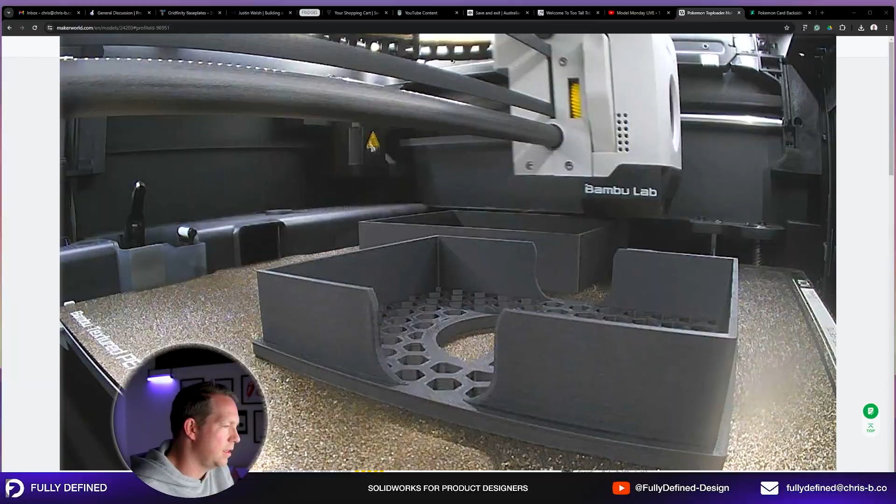This one today, we're going to help my son create a little carry box for his Pokemon cards. Now, I did try and shortcut this by downloading, and the problem with this, I didn't really look through the comments and details of the project that closely, but it's not just for the cards. So when we did print it and he pulled it off the printer and fit the cards in, it just had a little bit too much room. So I said we can do better. We can stick to the original style of this and do something that's actually going to suit the cards without the holders that they come with.

So this video is going to be for beginners. We're going to look at how to build a simple two-part box and also reference a sketch image. So we're going to bring a sketch image in and use that in our drawing. So just a shout out to Taniva 1030 on MakerWorld for his model. Did rate it 5 stars. Very good, just not quite the size for what we're after here. So let's get into it.

I'm going to start with just a standard part file. And we're going to do this in a multi-body part, and then we'll split them out for the 3D printing aspect. Okay, so what we're going to start with is actually getting the size of the card and the artwork into our file here. I'm not going to do anything fancy. Main thing that I am going to do is I've done a search online and just found a good piece of artwork. This one on DeviantArt by Atomic Monkey TCG. I just logged in and downloaded this image because one thing that you can do in SolidWorks is insert images into your sketches, into your part files, into your assemblies, often for reference. And that's what we're going to do here. So I'm going to show you how to do that.

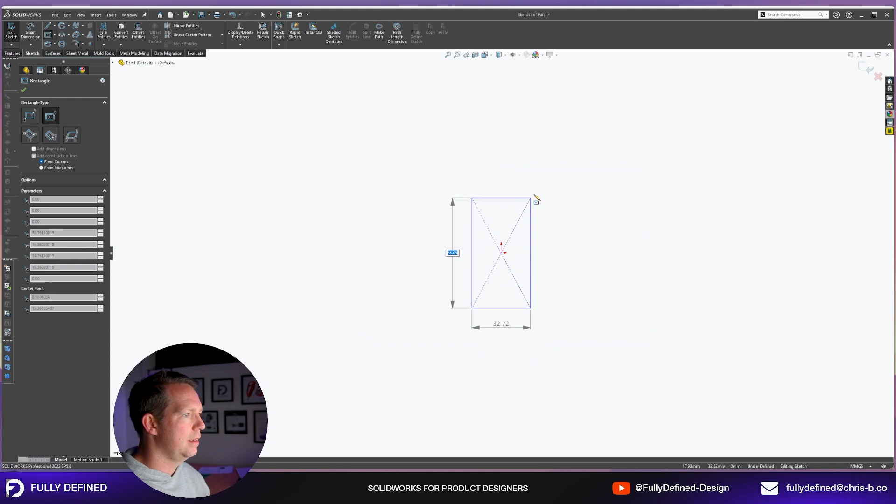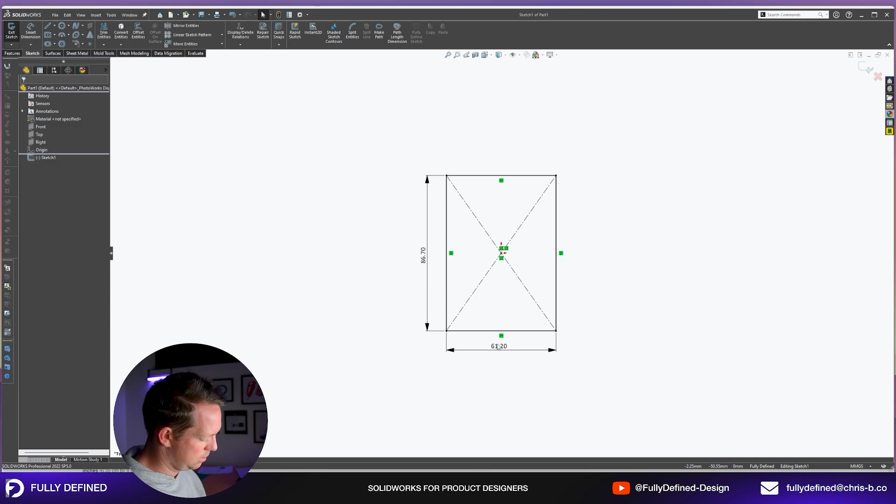First, on this top plane, we're going to draw our card and dimension it. So we're doing a center rectangle. I'll just grab my calipers. I'm just going to measure the size of this card. Could look it up, but I'm just going to do it while we've got it here. 61.2 by 86.7. Let's just check if that's the right size. All right. They are 2.5 by 3.5 inches, 63 by 88 millimeters. So we're a little bit undersized here with these ones. We don't mind a little bit of clearance. Maybe that card I had was a bit of a dodgy cut. It does look a little bit undersized compared to another one. So I'll go with the official size, 88 by 63.

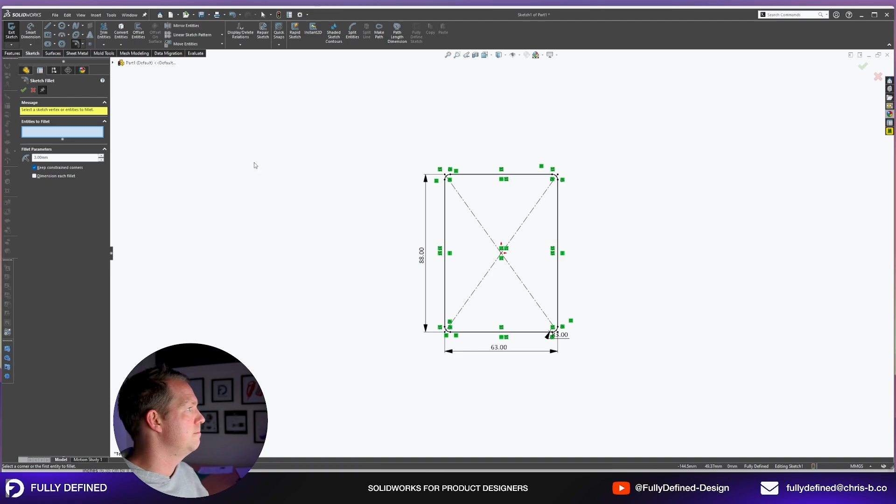I'm not going to worry so much about the radius. I don't think we're going to put that in our part, but it looks to be about 3 millimeters. Let's put that in, and we're just going to leave this here as a sketch. And then we're going to do another sketch on the top plane, and this is where we're going to insert our image. So to do that, I'm going to go Tools, Sketch Tools, and I actually have to be in a sketch for this to work, and I can use this original sketch. So I'm going to use that there. Now, Tools, Sketch Picture, which is just down here. I'll just move my head for a second. Sketch picture, it's just off the screen where you can see it right there at the bottom.

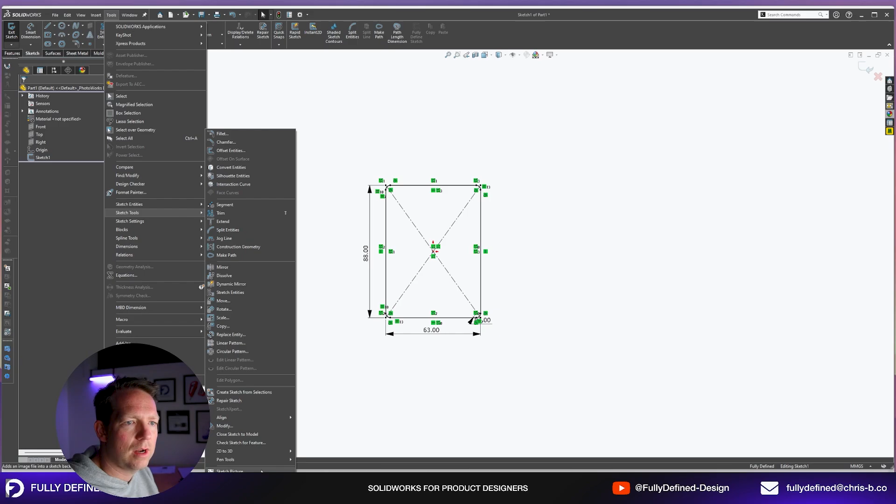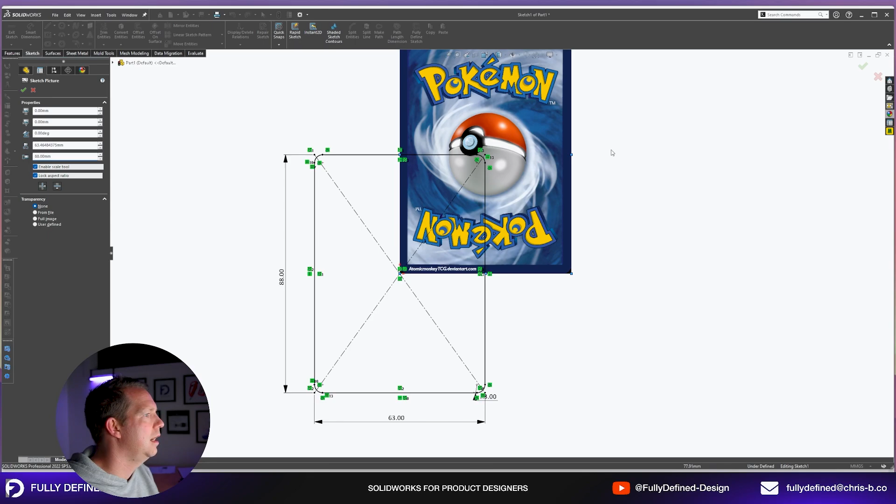And then I'm going to go to the file. Now I've just put it in my downloads. That's this Pokemon card PNG. I'm going to open that up. Low resolution is fine. And you can see it's huge, okay? But we can scale it down, and I can scale it here to dimensions. So we've got this 1477 by 2048. If I change that to 88 and scale that card right down to size, and then if I want to move the location, I can click and drag it manually like this, or I can actually put in some dimensions. So X direction is going horizontally side to side. So that's going to be minus 31.5. And then height is going to be minus 44. All right, and then we have it in perfect location.

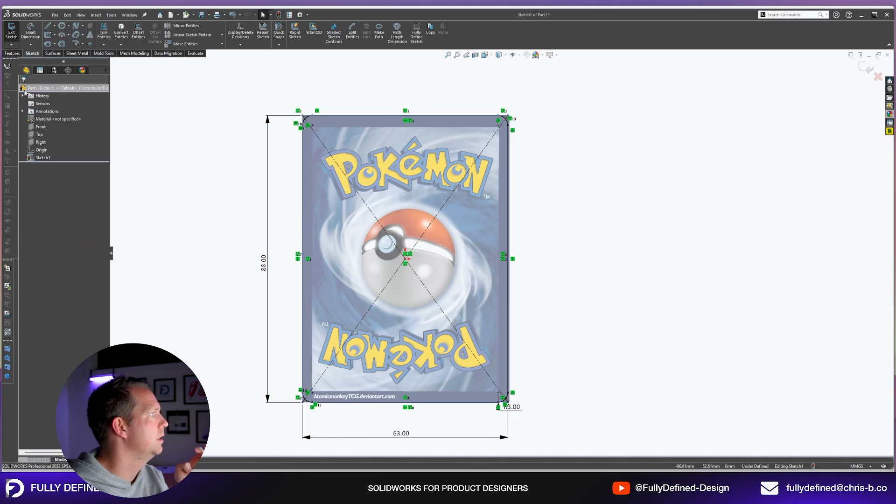Now we can also make it a bit transparent. So transparency, you can go full image and just put that up to like 0.5. So we can kind of see through it. And then I'm going to press OK. Now that image is going to show whilst the sketch is visible. If the sketch is hidden, then I can't see that image. Okay, so now let's draw our box. First, let's save that. I don't want to lose this one. Always good to get a save off early. Okay, and we're going to use the one that we downloaded and printed as a reference.

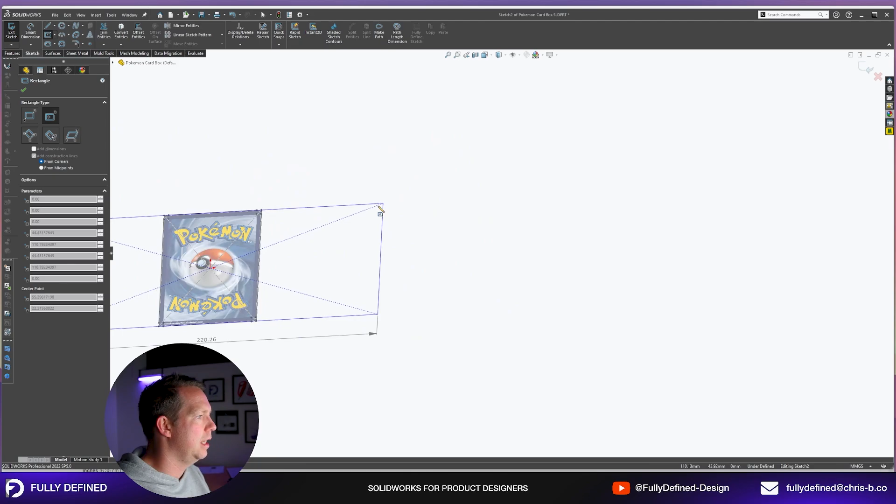Okay, it's quite a nice design. It's got some quite good thickness and detail to it, so we can reference a lot of that, but we don't need to be exactly the same. Let's go on the top plane, and first I'm going to design the inner frame, and to do that I'm just going to go like a millimeter bigger than the existing. So I've dropped it on the center point, just going to put a millimeter on that side and a millimeter on this side. And then these are going to be my inner walls.

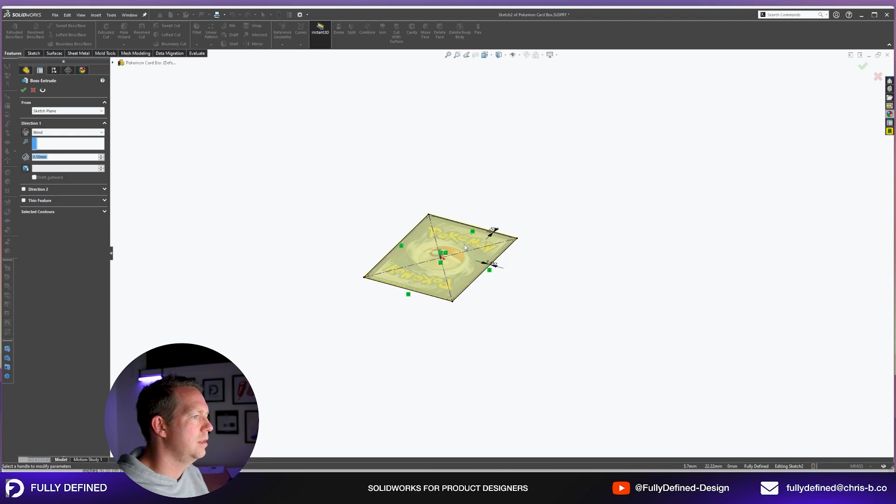My inner walls on this sample here are about 1.5 millimeters. They feel a little bit flimsy. This is for my son, he's 6, so I'm going to bump those up a little bit. And I want to give them some good height, because that's going to determine how many cards they can fit in. So I'm going to make it 20 mil. Now this extrude here, I'm going to use the thin feature. I'm going to set that thickness to 2. I'm going to set the height to 22. Press OK.

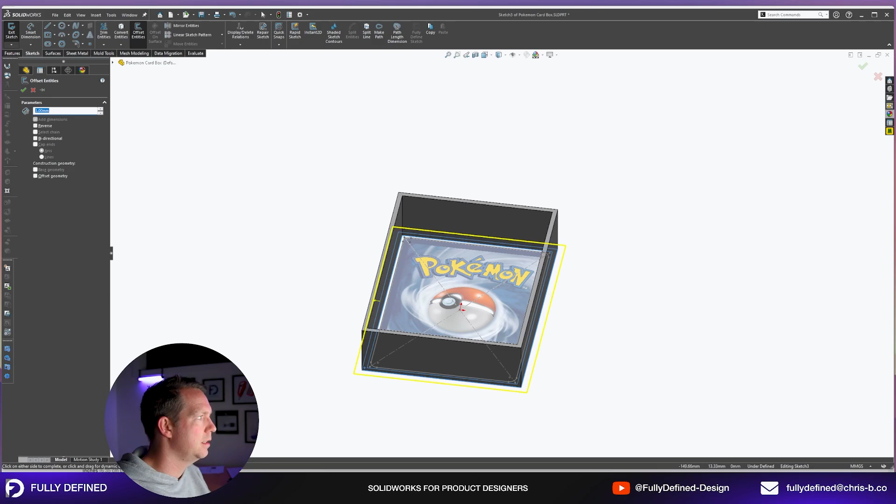And then I want to do a surrounding bottom cover. Now that is going to have a 3 mil wall thickness. So here we're going to reference the existing shape and use the offset entities tool. So on the sketch toolbar, offset entities, change that to 3 millimeters, press OK, and then thickness. Extrude, this one change to blind, 3 millimeters. We're going to go down. So when we do this, you can see instead of going up, it would merge in with the existing body and reduce the height of those walls. I want to make them a bit longer, so I'm going down. Okay, and that creates the bottom of my box.

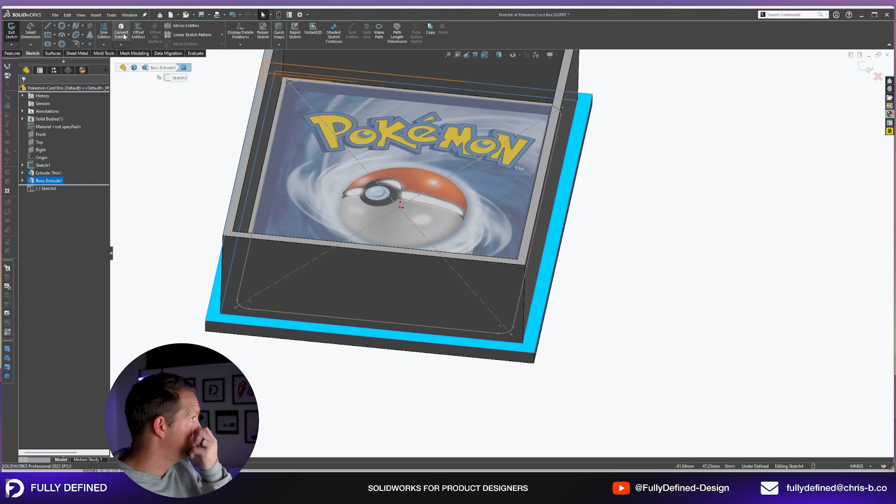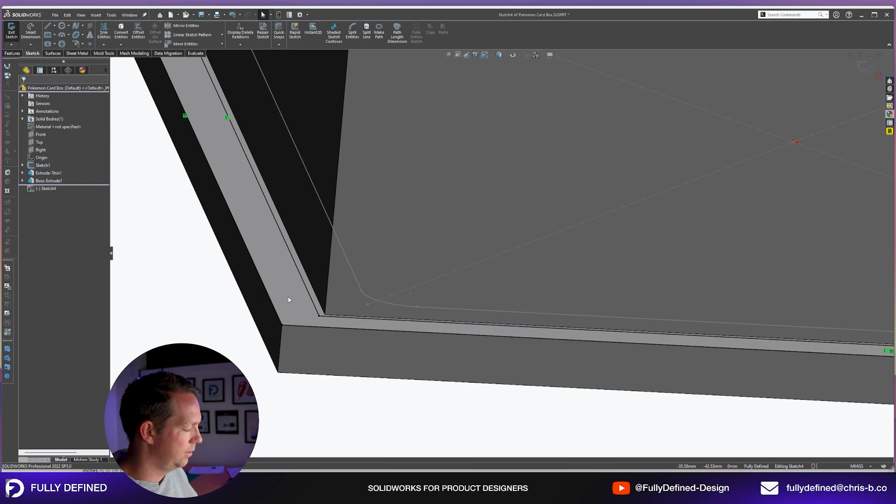All right, now that looks pretty good. Let's do the top side of the box. So how this will work, we will do a sketch here, convert entities for the outside, and then for the inside layer, I'm going to select loop. I want to select around the face, and we'll give this a little bit of clearance. So let's say 0.4 of a millimeter. Okay, so when those two boxes slide over each other, it's not going to be like a super tight fit. They're not going to drag on the edges. We know there's a bit of tolerance in 3D printing, so we'll keep that nice and smooth there.

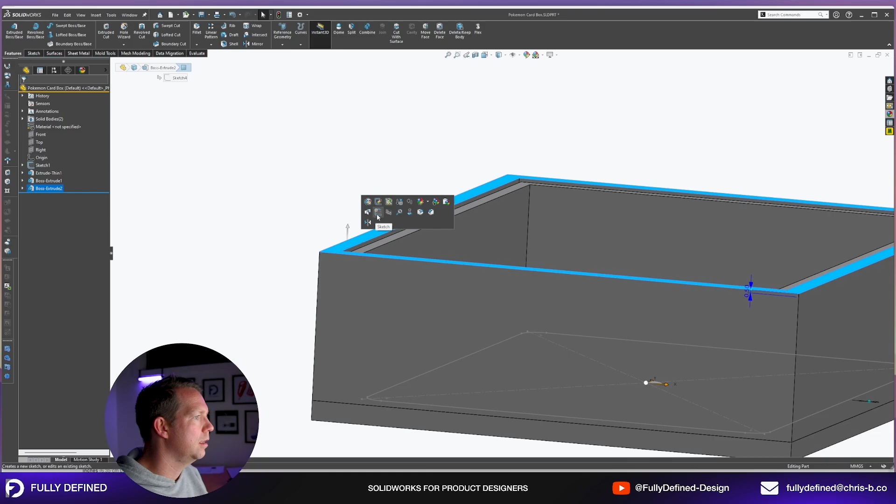And we will go just a little bit past this face, maybe half a millimeter. All right, so this side is going to sit above that face there. So you can see reverse offset. When that's ticked, it's going above. I'm going to uncheck merge result because this is going to be the outside of the box. And then I'm going to convert that edge and do another extrude. This will be blind 3 millimeters. This will merge just with this one. And then we have our box. We have 2 solid bodies and we have a top and a bottom.

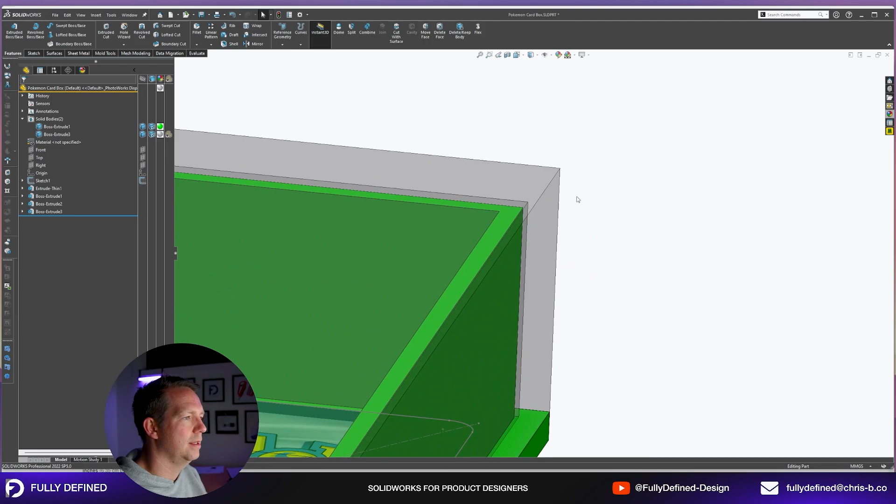Let's make the bottom body a different color. Let's make it green. And if we make the top transparent, then we can see what our box looks like. And we can see in the preview the clearances that we have around the part. All right, so that's the basics done. Now we can add a little bit of finesse to this file.

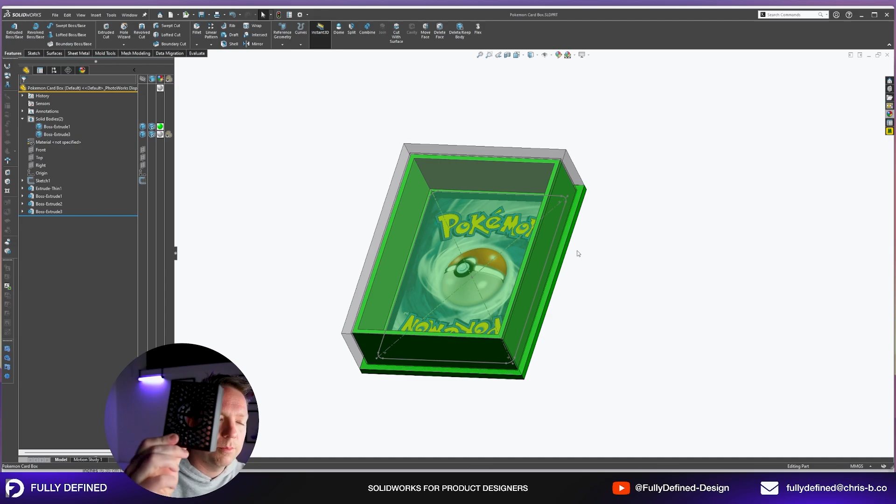So first up, what I'd like to do, as this sample has here, it's got a really nice sort of detail on the front and the back. It's got a Pokémon logo, or Pokeball. It's got a nice hexagonal cut through everything. And this inside piece here has a nice shape through the middle so that you can grab the cards out from the sides. So we're going to add in those details.

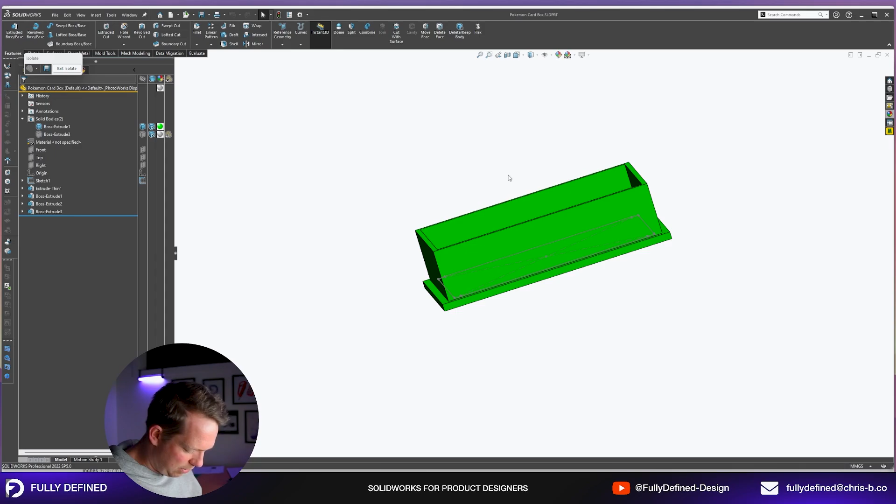Let's add in the one at the bottom first. This one should be pretty easy. So just using this size as a reference, felt pretty good. There's 25 millimeters through the middle. So what we can do here is a sketch on this top face, a rectangle shape, going all the way to the edges, make it 25 millimeters in between. And I'm going to do cut extrude up to this surface.

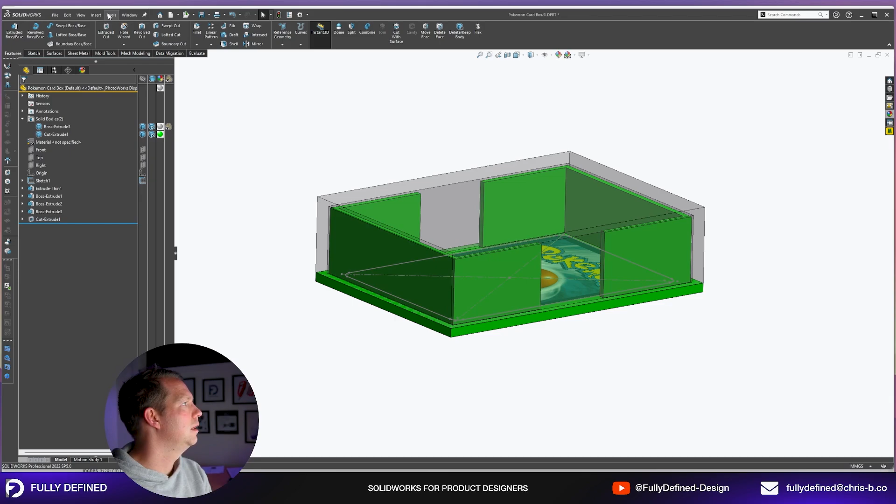Because I use the isolate tool, this is the only body that's showing at the moment, which means if I do this cut, it's only going to cut through this body. I'm going to turn isolate off. You can see the other body still has its full shape. To use isolate, you can right click on a body. You can click on this little menu here where it says isolate. I have also created a hotkey, which is the letter I. So when I select a body and I press I, it automatically goes to that isolate mode. Now this one also has some nice fillets on those edges.

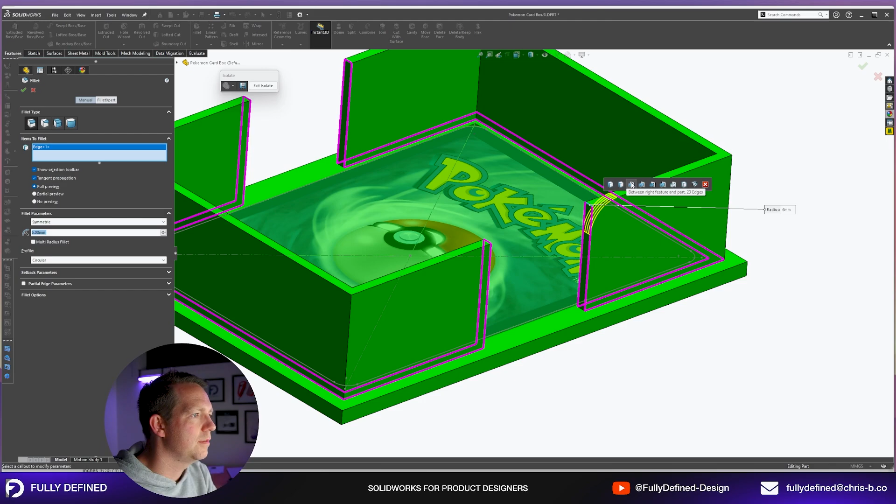So let's add some fillets. So top and bottom, it's got fillets. I'm just looking to see if there's a shortcut here to get the edges that I want. Doesn't look like it. That's okay. I'm going to click on these 4 edges on both sides. Okay. Now that one looks pretty good.

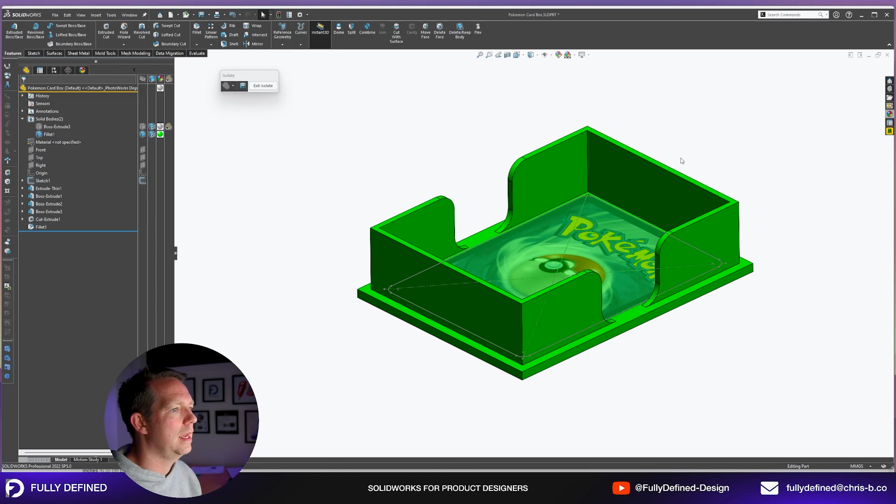On our parts, at the moment, we've also got these sharp corners everywhere. So we'll just add a little fillet to these, and do the same on the outside edges too. So we'll just give it like half a millimeter radius on the inside edges. We can do it selecting each of these on the inside.

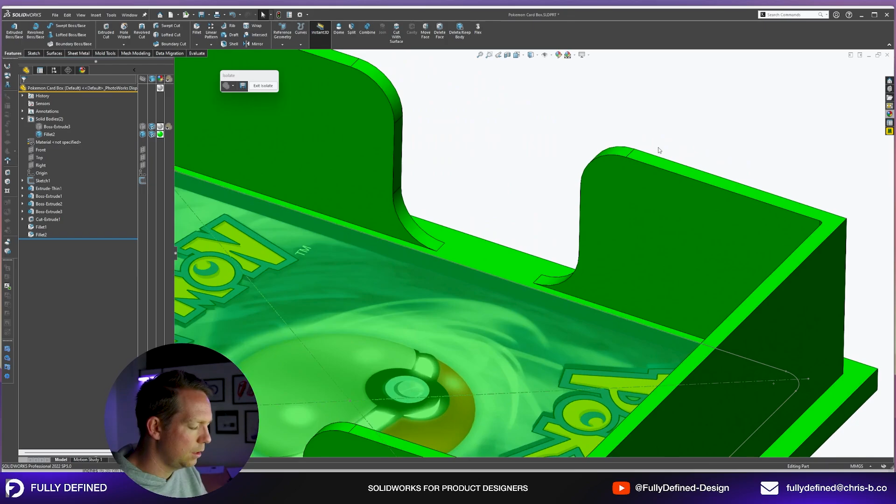Okay, so 4 edges. Now I can only do fillets on one body at a time. So even though there's a separate body, which will probably have some of the same fillets, we'll just do them separately. The thickness of this part is 2 millimeters.

My internal radius is 0.5, then I should make my external radius the internal radius plus the thickness. So that would be 2.5. And then if we want to keep a nice shape going, we're going from this wall to this wall, 3 millimeters. So I could do a 5 millimeter radius on these outside edges here. Okay, so that is looking much nicer now.

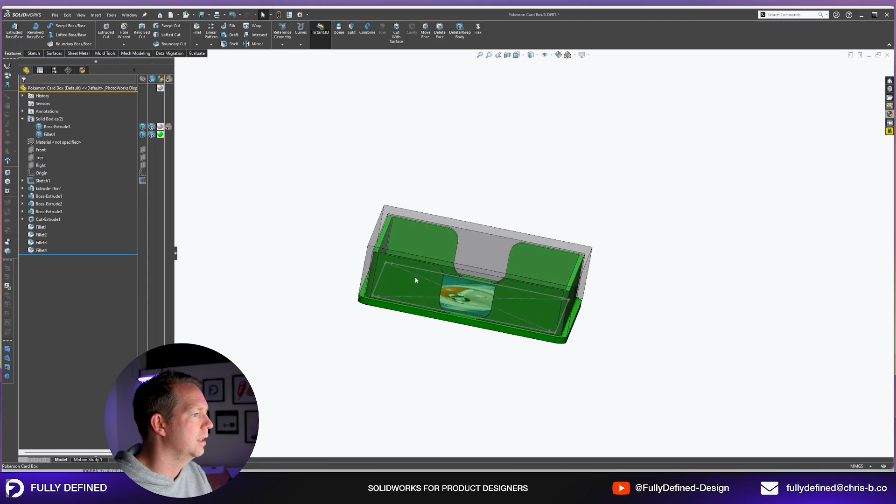If I exit isolate and I look at the outside box, we can see that it doesn't quite match up. So we'll have to do the same treatment on the inside. That's fine. Let's do that now. So I'm going to isolate this one, hide my sketch. On the inside, I'm going to do 0.5 mil radiuses.

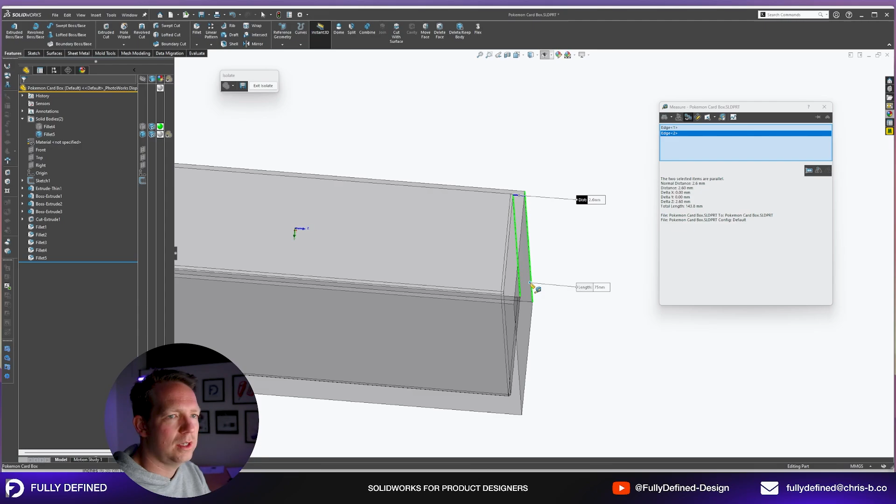And on the outside, where our thickness has changed a little bit because we did that offset, it's only 2.6, but I want to keep those fillets the same. So I'm going to do 5 mil, I think it's 5.5. No, 5 mil is correct. 5 millimeters for each of these outside edges so that the top and bottom match.

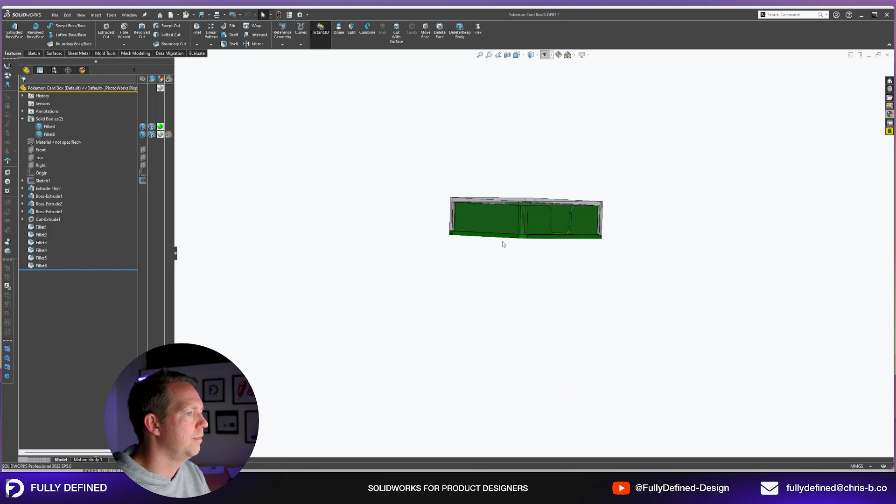And then for the very top face, you're going to leave that flat, okay? Because when we do our 3D print, that's going to be flat on the print bed. If I need to afterwards, I can just take the edge off with a ruler or a sharp blade. I think it'll be all right. So the radiuses are now looking pretty good.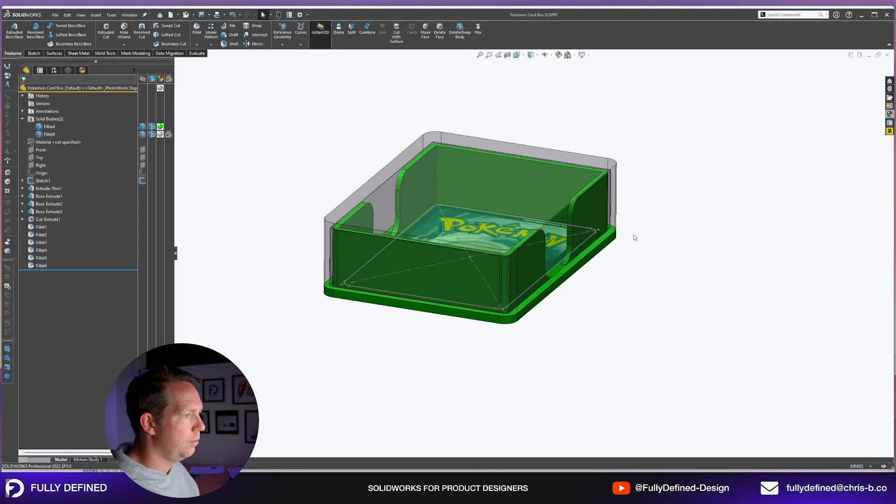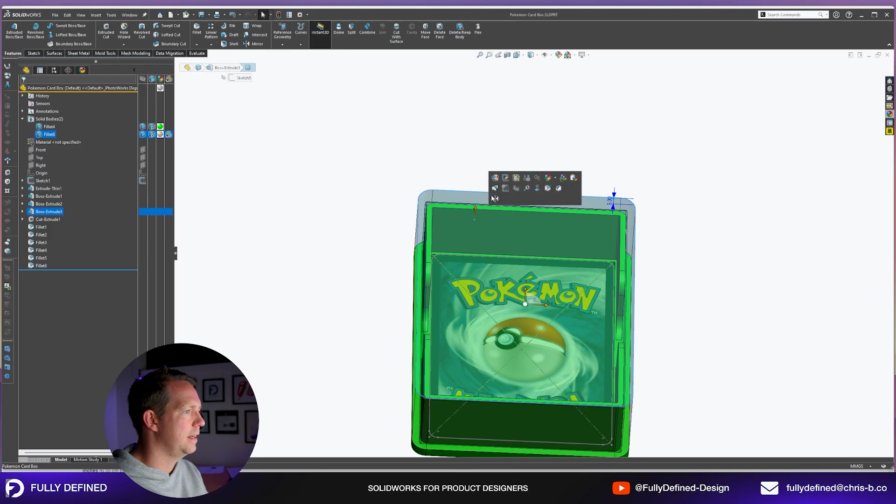Let's add a little bit of detail. What I wanted to do was actually do the similar sort of pattern for the Pokeball, but actually reference the artwork that's there. So on the front and back, we can see the Pokemon text and we can see the ball. Now to do that, I have to make sure that I'm doing the same thing. If the card is facing the front or the back, I have to flip it around. So to start with, we'll do it on the front face so that if the cards are facing up, let's say, we can get that text showing.

Now, before I do that, I actually thought maybe I could get the Pokemon text in here. Pokemon's a pretty common logo. So instead of tracing it in SolidWorks, I should be able to find a vector file of that online. A vector file is one that has the line work within the file. So I've gone to a site that I've used for a very long time, brandsoftheworld.com.

You have to log in. I've done a search and I can see there's a Pokemon logo here, which has an AI file. So I'm going to download that file and open that up. Now it's an .ai file. We can't import that straight into SolidWorks, but I can open the AI file, resize it, and then save it as a DXF file. That DXF file we can import straight into SolidWorks.

I'm not sure exactly how well this logo will 3D print, or how well it will look in the box, but it'll take us a few minutes to try it. All right, so the vector file that we've got, we can see here. It's actually got a few more layers than I would like. But let's focus maybe just on the blue colors. So I'm going to edit this, actually I've got a good idea. I'm just going to merge everything.

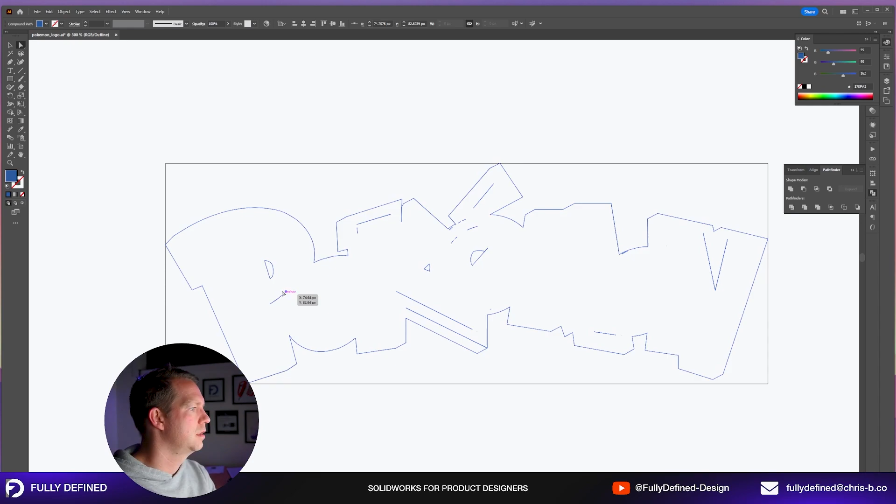Because if I just get an outline, that's probably going to be enough. And then I'm just going to get rid of these holes on the inside. Now these are Illustrator tools. I'm not doing a tutorial on this one, but just showing you part of my process here. These are some of the tools of the trade for a product designer.

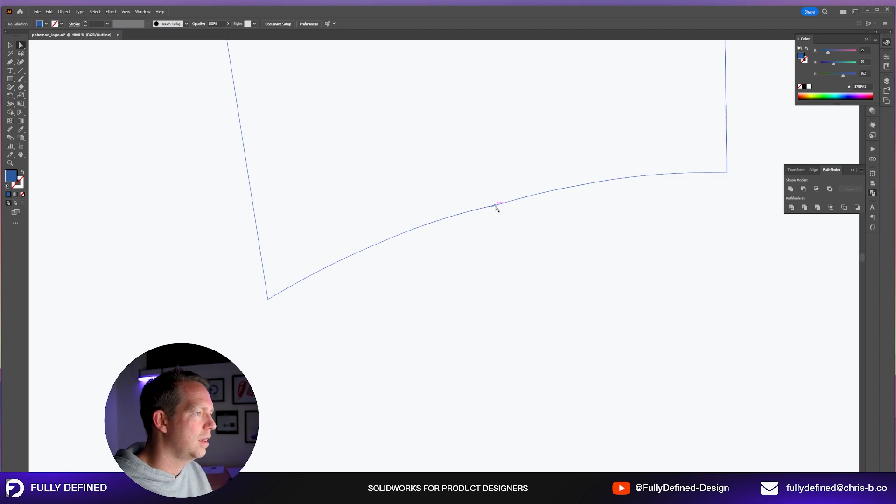Okay, I'm just clearing out all the dangling lines. Just going to save me time in SolidWorks. I still might have issues with little bits like that. But I could probably clean that up by selecting it all and just going to Path > Simplify.

And yeah, that just gets rid of a few points and it's still going to do the trick, right? Okay, so that looks pretty good. What size does it need to be? About, if I'm measuring on the card, 51 millimeters. So if I select it, I just change the size here to width 51 millimeters. Okay, that's the size I need.

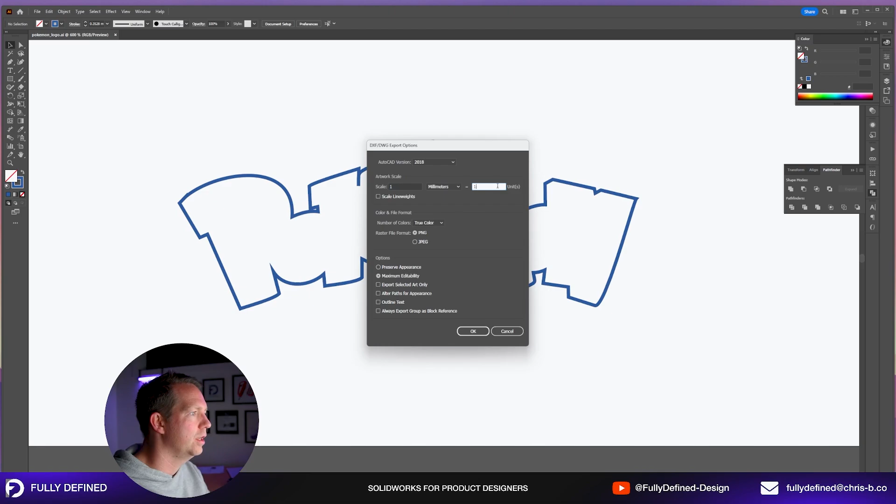I'm going to go to an outline and I'm going to go to my folder where everything is, and I'm going to save it as an AI file first so I can come back and edit it if I need to. But after that, I'm going to export as a DXF file. So I'm going to go File, Export as, save as type, DXF, export. I'm going to pick 1 millimeter equal 1 unit because I'm in millimeters within SolidWorks.

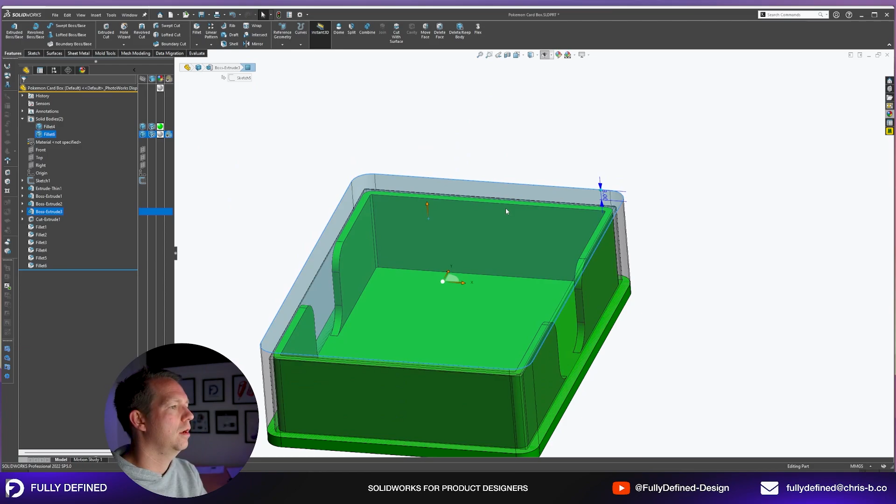Okay. Let's flick back over. We are in a sketch here already. Now, when you insert a DXF, you actually want to be out of a sketch and you select the face you want to insert the sketch. So I'm selecting this top face and I'm going to insert DXF. I'm going to browse to that folder. The file is, you can see it here. Gonna go open. I'm gonna import it as a 2D sketch, and I'm gonna use millimeters for the imported data and go finish. I'll import it to the origin.

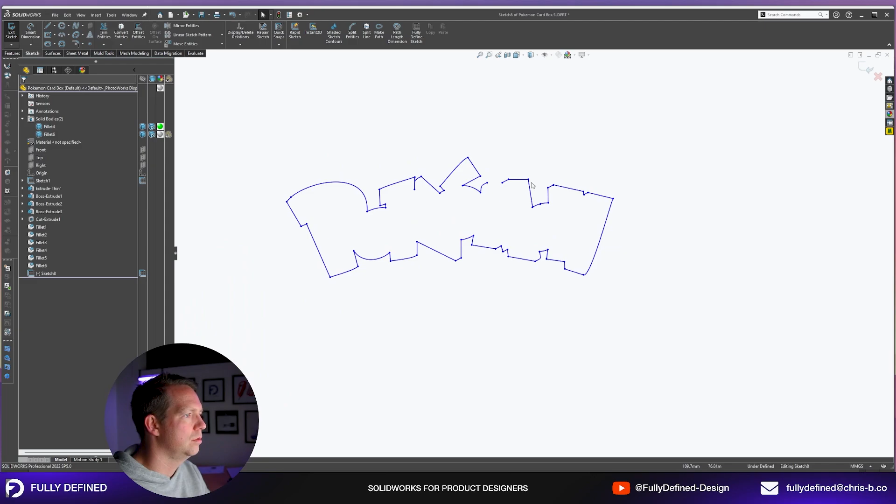Where is it imported to? Over here. It's just hidden at the moment. I'll turn that on, I can see it. I'll right click here and go make edit sketch. That turns it into a normal sketch that I can then move. So I'm going to edit sketch. I'm going to group it. So select all of those, make it into a block. I'm just going to move it into position.

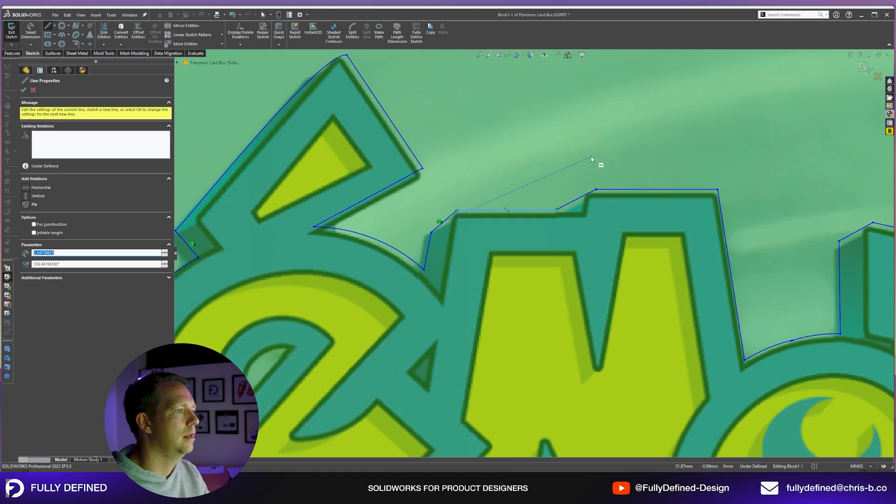Now you can see it hasn't imported perfectly, but maybe it saved me a little bit of time. I think I might just have to scale it up a little bit. Let me just get the scale right. Okay, that looks pretty cool. I can explode the block or edit the block just to clean up these little bits here. They've got a bit funny. I'm just going to draw that one in there, and this one here. Just going to delete that one, take that over, trim that away. Right, rest of it looks decent. Close the block, close the sketch.

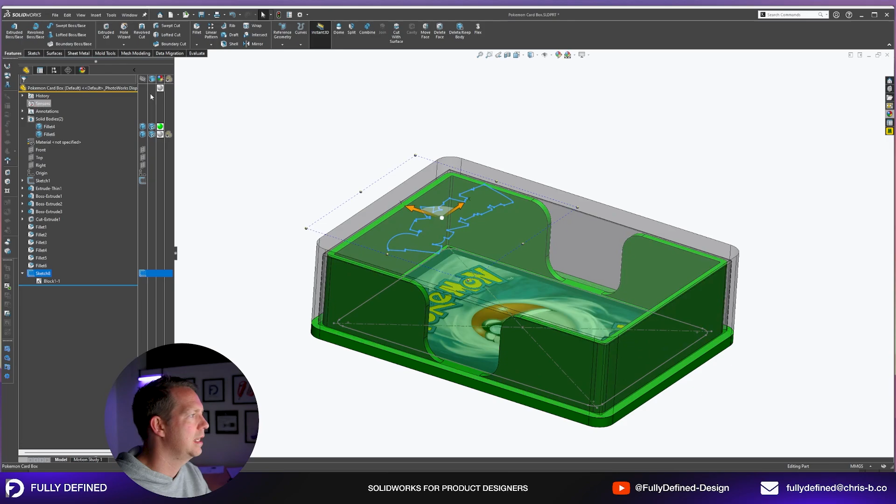Okay, so I've got a logo there. So I'm going to do the logo and a Pokeball in the middle, both front and back, and then I'll fill the rest of the space with a hexagon pattern. So let's just see if we can cut using that. And the answer is no, we can't. Now, unfortunately, I spent way too much time trying to fix this sketch. I should have given up, or I should have tried a different method a bit earlier.

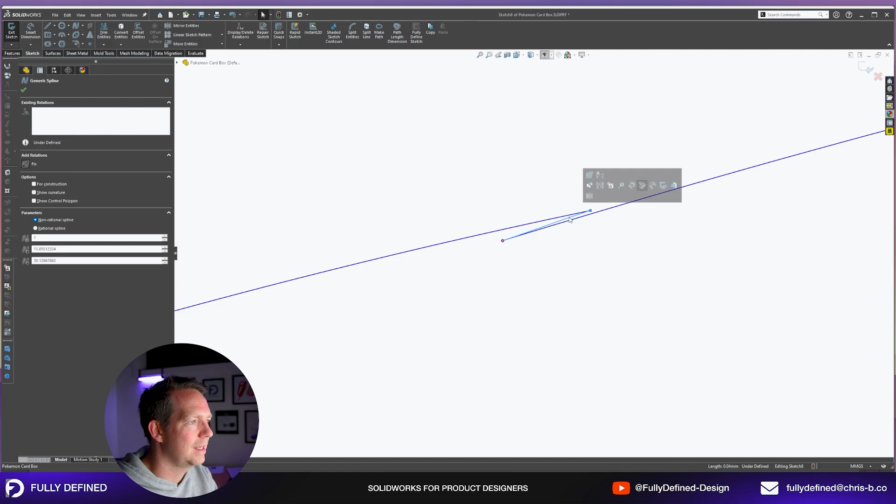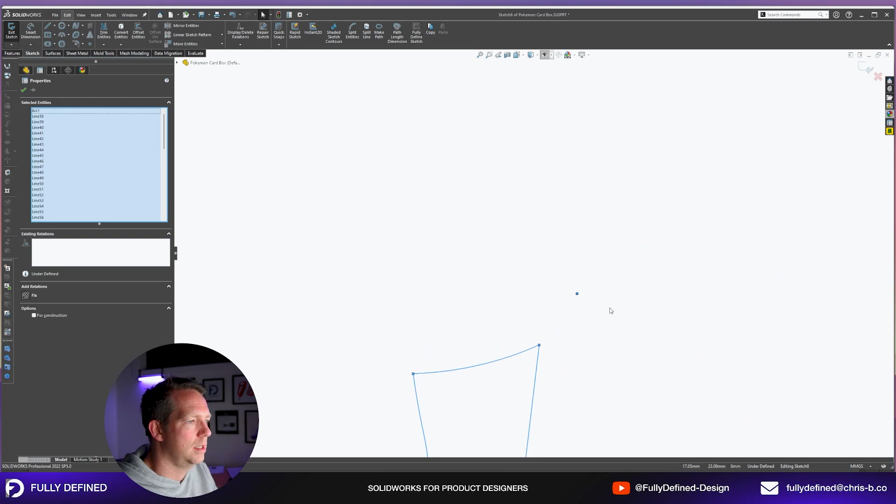Essentially, what I was trying to do is discover where my imported sketch just didn't work, was messy and needed to be replaced. But it turned out I need to replace half the sketch here, and in the end, anyway, the logo itself is not really suitable for this kind of cut-through detail. It's just too many sort of sharp points. It doesn't really look that good. Didn't really match up as well with the Pokemon card as I would have liked. So, yeah, look, it's all a bit of experimentation, so that's fine. But if you hold on and watch the second section of the video, version 2 of this, we do it in a much better method and get a much better result.

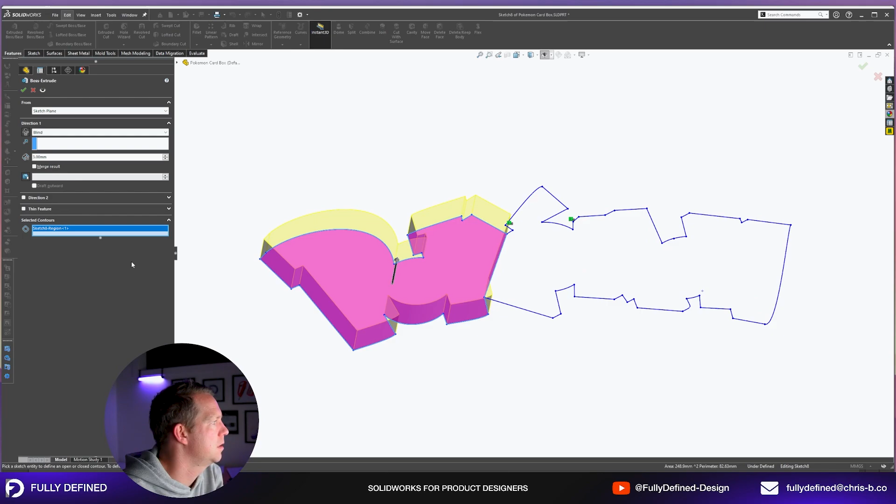All right, so another trick you can use is divide up the shape into segments and use selected contours to see which ones you can extrude. So this side I can, this side I can't. So that means the problem is on that other side. So let's just try another little sketch segment from here to here. Let's try it again. So this one we can, this one we can't, this one we can. So the problem's in here.

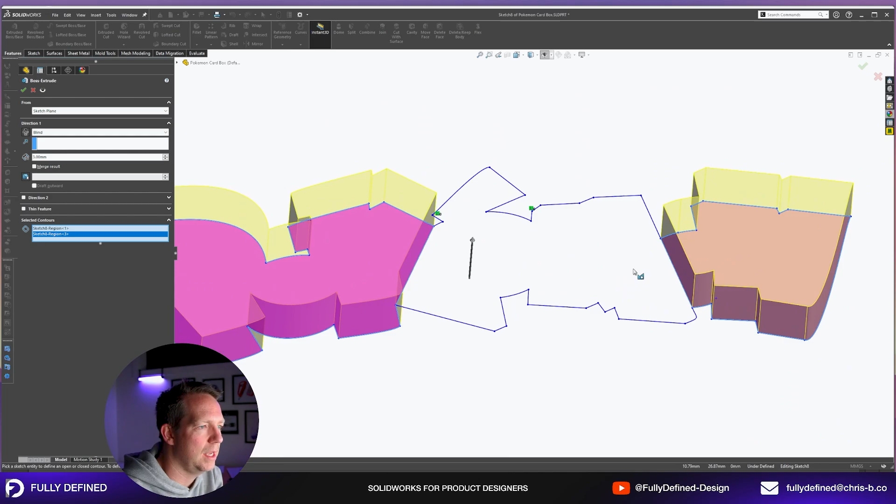So we're just narrowing down where that problem section is, and then we can go through and select each of the segments to find where it is. So it's somewhere in here. All right, so now we know that it's in that area. Okay, so one thing we could do now is just delete each of these segments, there's not that many, and redraw them, which I could do.

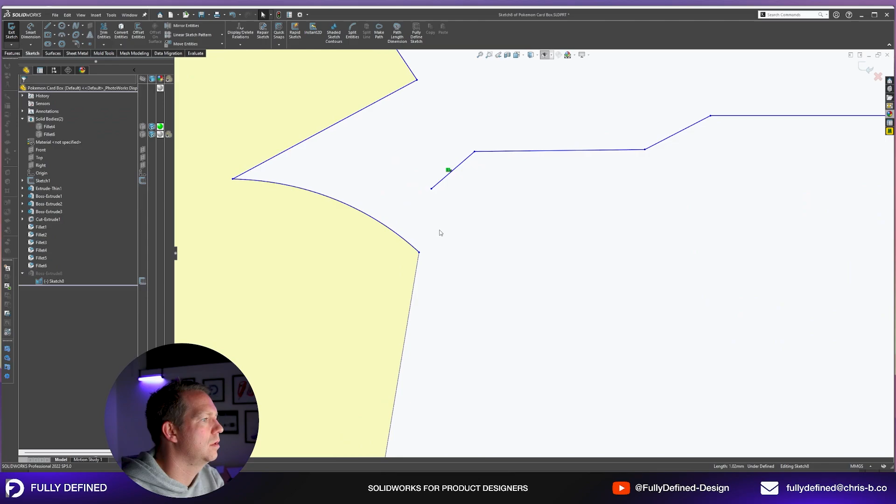So I'm just going to draw one line at a time. So what I'm going to do is delete a line and then re-sketch the line in between the two remaining points. Now I'm just using straight lines for all of these. And last one here. Let's see if that's fixed the issue. We can go back to our boss extrude and see if we can select this face.

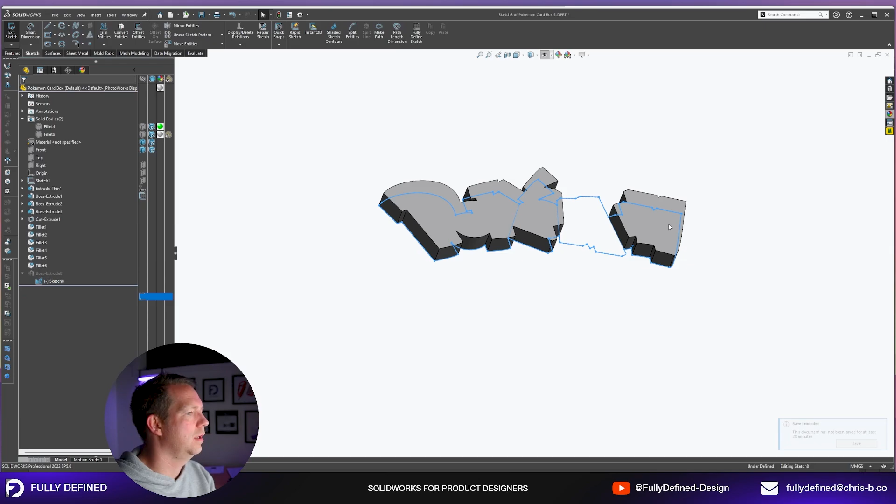And now we can. So that has fixed the problem. If we go back here, we delete all these dividing lines. You can see we can now do an extrude, which is good. So that now means we can do an extruded cut through that top face. All right, a lot more fluffing around than I would have liked, but we got there.

Let's do the Pokeball as well. This one I am just going to sketch because it's an easier shape, although it's kind of two different balls. I'm sure we can work it out pretty quickly. I'm just drawing a couple of circles. I don't really want them to snap to those lines. Unfortunately, those lines are part of the same sketch that's showing the pattern, so it's a bit hard to not put them in. I could turn off automatic snap: sketch tools, sketch settings, automatic enable snapping. I'll just turn that off and I can reposition it how I need. That's good there. And this one is good there.

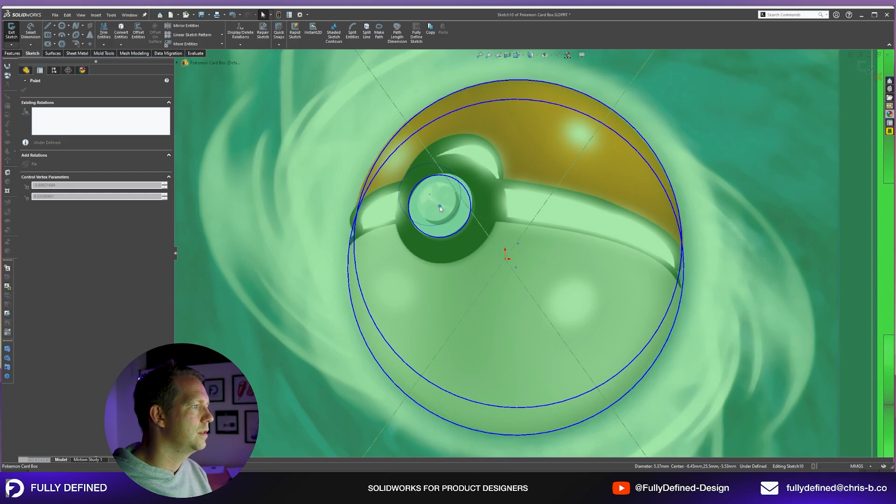And what we're going to do on this shape, I think, is kind of do a silhouette of the ball. So all the white area in the middle, we'll get rid of that, which actually means I'll just go a bit bigger on this one. Go for this size here. And then I'm going to turn that snapping back on. Sketch from, let's say, here to here. Again, we don't need to be perfect on this.

In fact, let's go from one side to the other. Let's trim away what we don't need. Out there. Just to make it a nice curve, it should probably go from one side to the other like this. That's fine, and that's fine too. They don't need to be perfect arcs. So the parts I'm going to cut away will be the top and the bottom. So we're going to go extrude cut, select this contour and this contour, and go through all and select this top body.

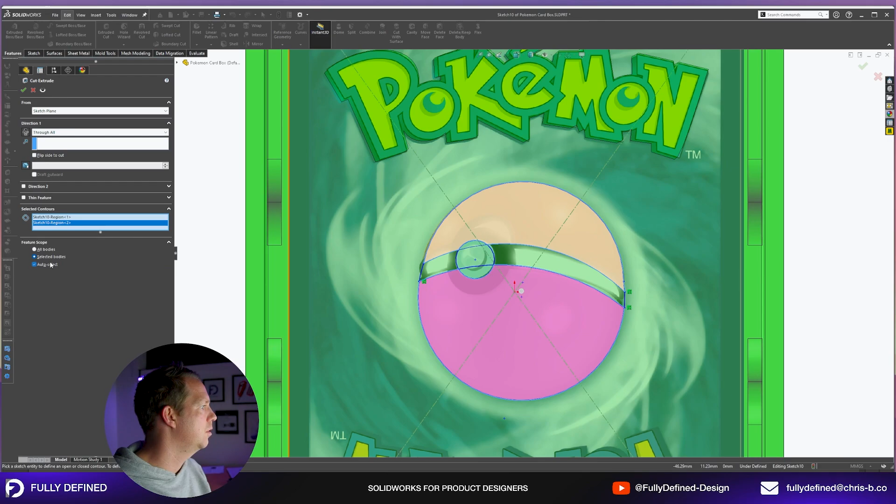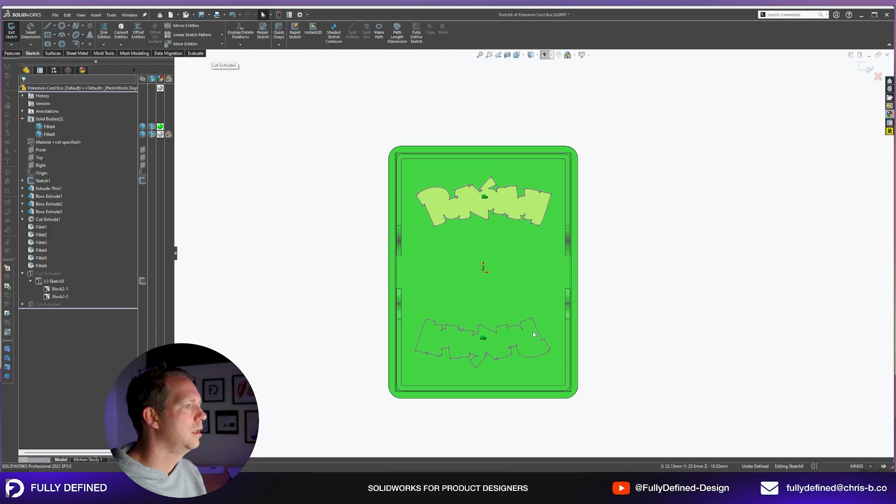That's looking pretty good. Now, last trick, I also want to do a repeat of that Pokémon cutout on the other side, so that we're covering both sides of the ball. So to do that, I'm going to take this sketch here, make it into a block, select it, and do circular sketch pattern by 2. And that's going to work because I've done my whole assembly around the origin. So the origin's there, and it's using that as the default point to rotate that sketch around. It's going to be close enough.

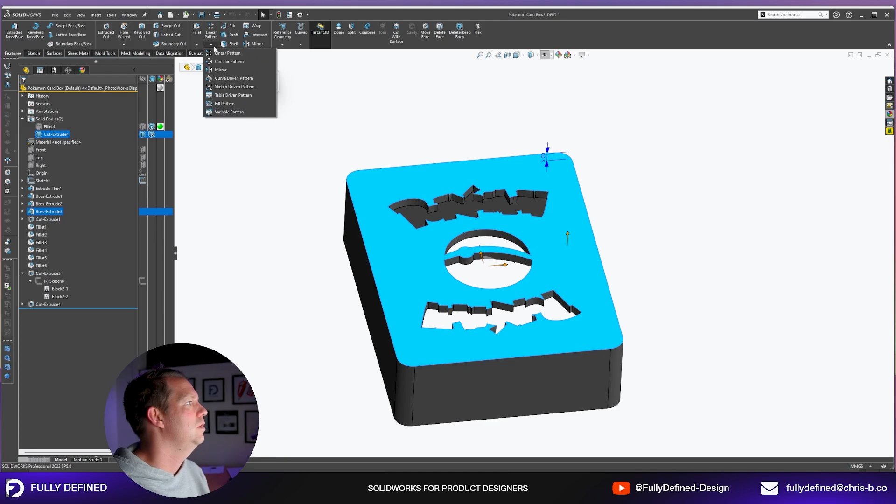All right. There is the top of our box. So if we just have a look, we can see what that looks like. Last couple of steps, we're just going to do the rest with a hexagonal pattern. Now that hexagonal pattern on this one, the size of the hexagons is about 6 millimeters. Click here and use a fill pattern, and you're going to do a staggered shape, cut, 6-sided, size being 6 millimeter, direction across here, size between them will be like 10.

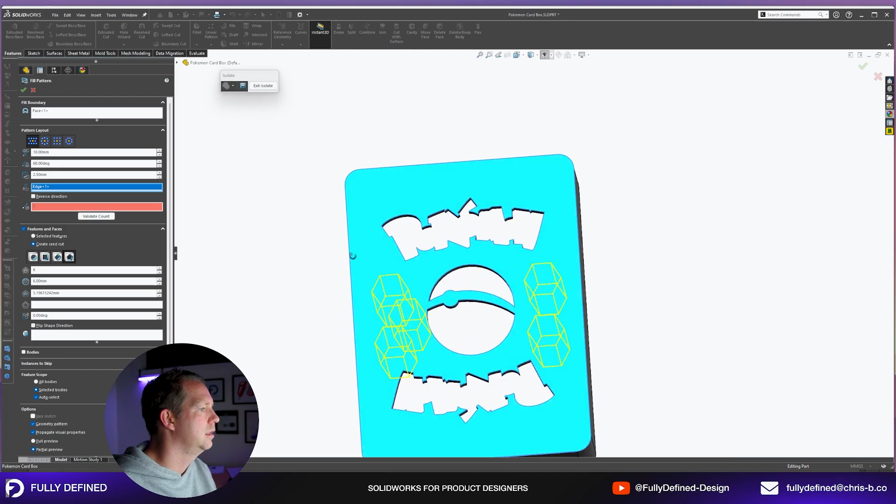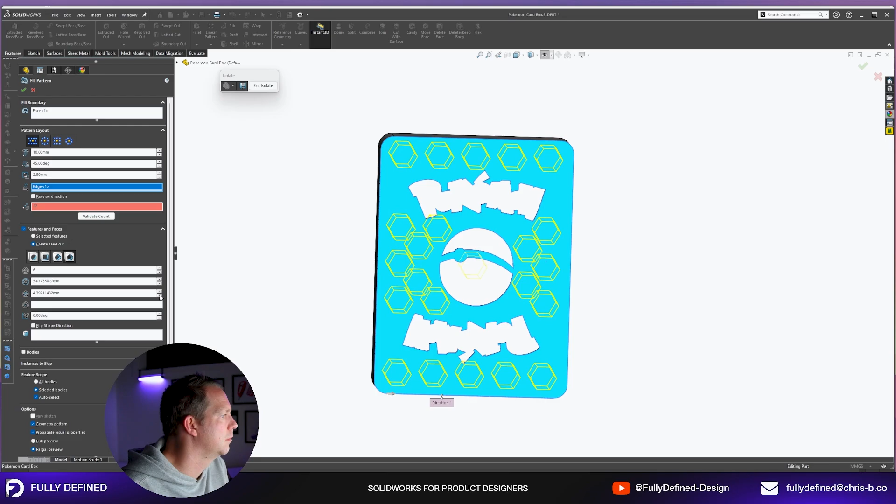Yeah, so at the moment it's gone a bit crazy. You don't want to do it like that. 10, okay. It's not enough space. We need to reduce the size, which we can do, and reduce the clearance from the surrounding holes. We can't do much of that. And the spacing doesn't quite look right. Should be 45. We're just reducing that to a better size. And you know what? It doesn't look as good as I thought it would. I think we can skip it. All right, so there's the top of our box.

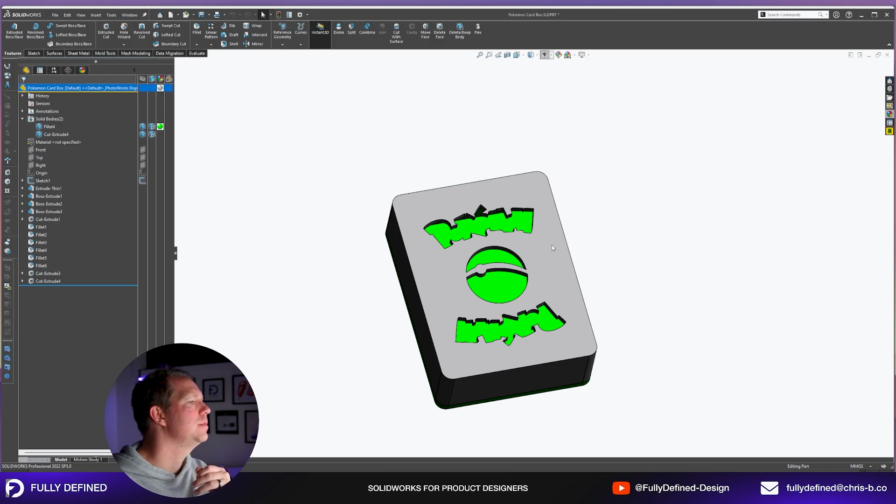Let's repeat the pattern on the bottom side as well. Now to do that, we want to reverse things. It's a little bit trickier. How can we do it? We will do it this way. We're going to create a sketch on this top face. We're going to select this sketch and convert edges, and this sketch and convert edges. I'm going to delete the bits we don't need. I'm going to put a dot here on the origin and make the whole thing into a block. Press OK. That's going to save the block in that place.

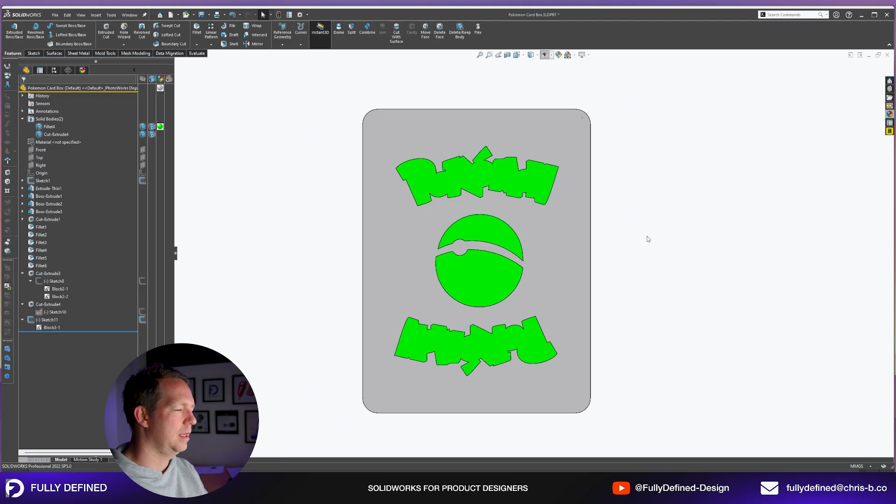I'm going to copy the block to the bottom face. I'm going to drop it here, and I'm going to rotate it 180 degrees. And then I'm going to go extrude cut. I'm going to select my contours. That's going through all. And now I have the same thing top and bottom. All right, we are looking good.

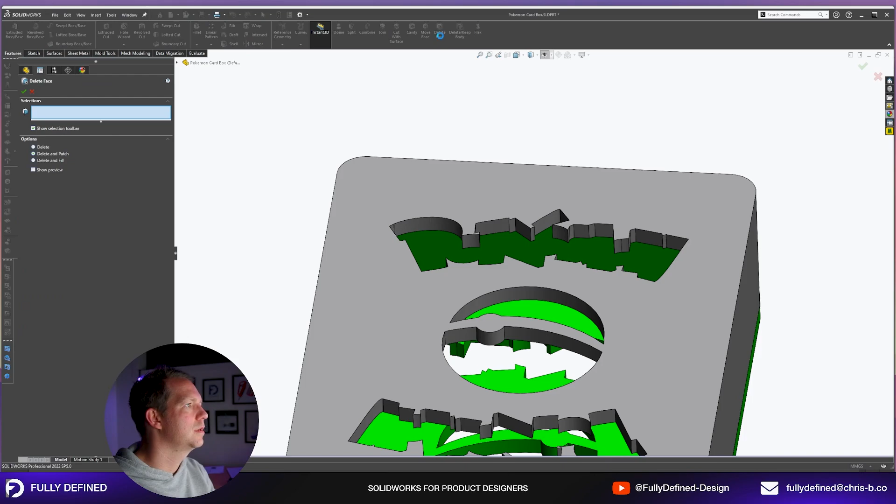Just before we 3D print, I'm going to have to delete some of these little overhangs. Just clean up those edges. So I'm just going to use delete face to quickly do that. Just clean up that one, clean up this one here. Just simplifying a little bit. Oh, I do have to do that on every face.

Yeah, it's going to be a bit annoying actually. Maybe it wasn't the greatest idea using this logo, but it's just a bit of experimentation, right? Bit of fun. Okay, so that's off that side. On the green side, we'll do the same ones. And then we're just about ready to export.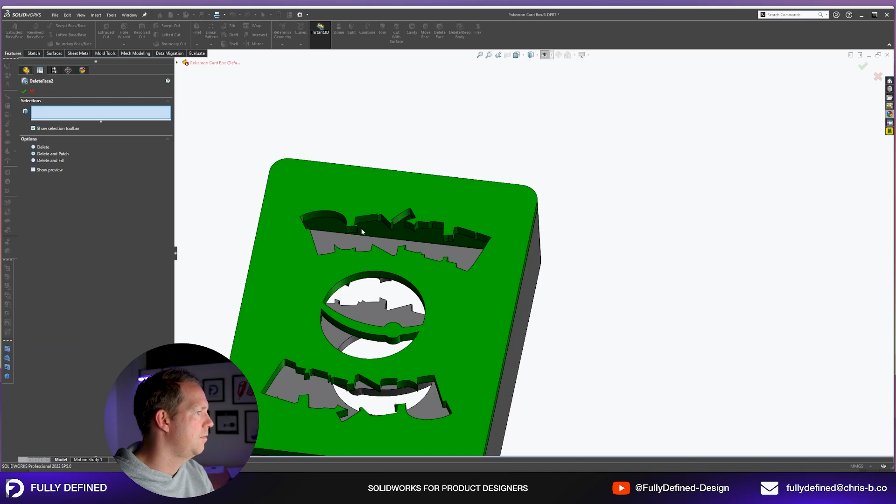Okay, done. Now, just before we export it, let's separate them, just so they're easier to import into our 3D print. I'm going to use a delete and keep body tool. So I'm going to keep this body, and then go File, Save As, and save it as a step, and give it the name top.

And then I'm going to do another feature and change it from the top to the bottom, and go File, Save As, and name that one bottom. And we're done now in SolidWorks. I'm going to save that file, close this down, jump onto my other computer for printing, okay, and I'll see you over there in a second.

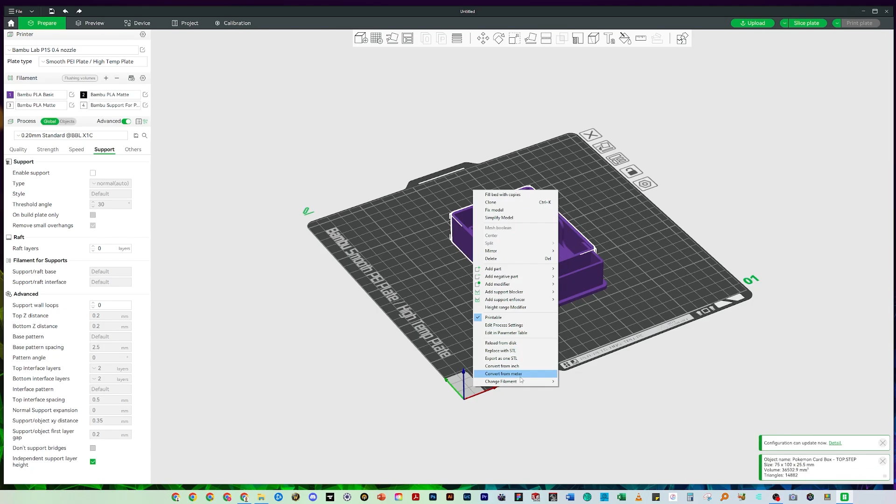So into Bambu Studio here, all we're doing is just importing the step files that we exported. We're getting them on the main flat face of the parts. This is the easiest way to print these without any supports. And just assigning materials and doing a slice just to see how they go. I think we're just using standard settings here, so we're not expecting anything too fancy, and we can see how these turned out.

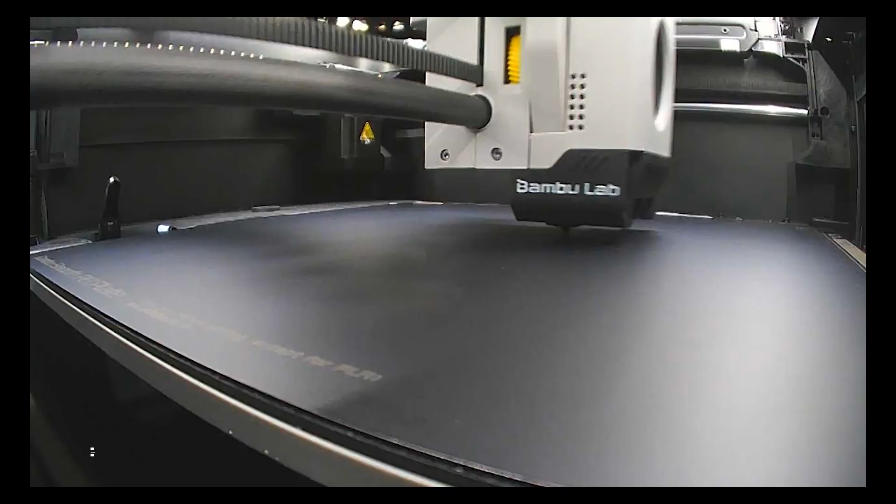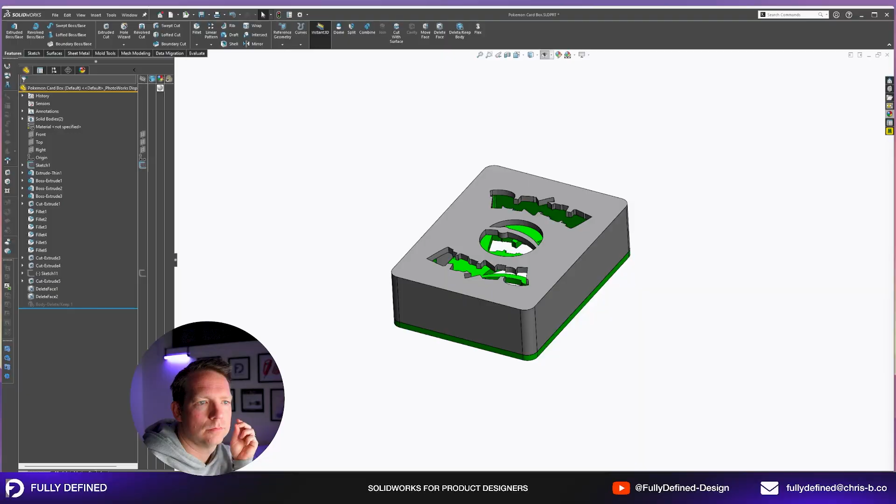So let's do better. I've taken it back into SolidWorks here. Just opened up the original file, and I'm making some tweaks. First off, I'm fixing those fillets, which were 0.5 mm off what they should have been. And then with the logo, I'm going back to the downloaded file that I had, and I'm just re-editing it.

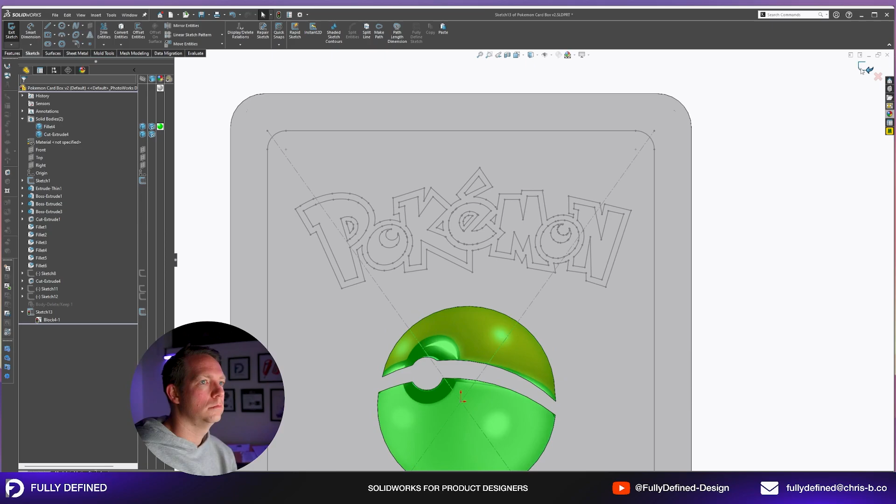And this time I've kept the two outlines of the Pokemon so you can actually still see the text, with my idea just to do a simple 0.2 or 0.3 millimeter cut down, just to create a different surface. And in that surface, in the 3D print, I can actually do something a bit different now.

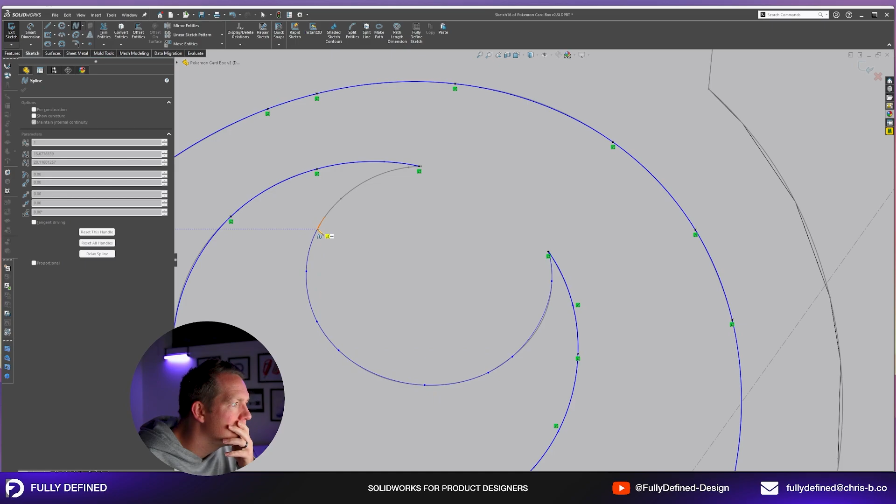Again, the graphics or the sketches themselves needed a little bit of tweaking, but not nearly as much. So it was just tweaking these O's.

So I did one colour on the top, and then on the bottom edge, I was just going to put my son's name in, just so we can identify this. You know, he's taking it to school, first time at school, so yeah, just make it a bit easier for him to find. And then to hold the whole thing together, giving him some rubber bands.

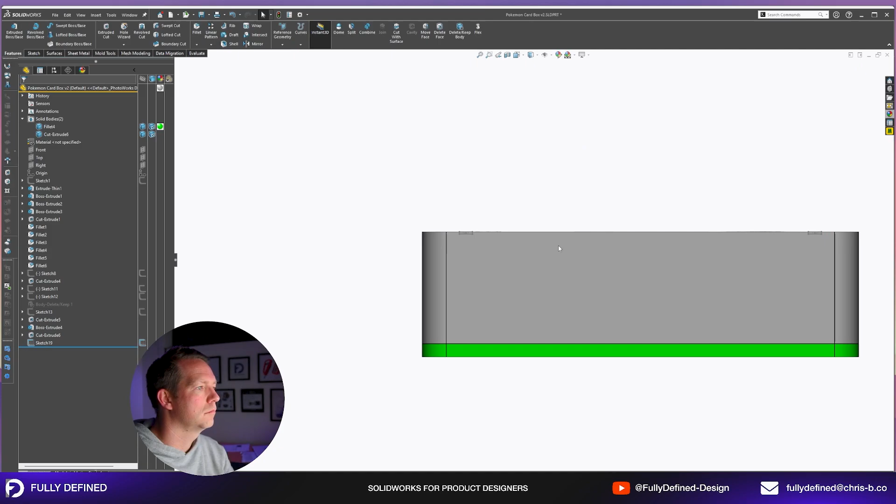So just putting a little recess in on the top face and the sides of the bottom face, just to allow that rubber band to sit neatly. So that detail worked pretty well.

The other changes I'm making, I'm just adding a few more fillets. So I'm going to print this face up second time round, so that the Pokemon and that top face gets a nice smooth finish.

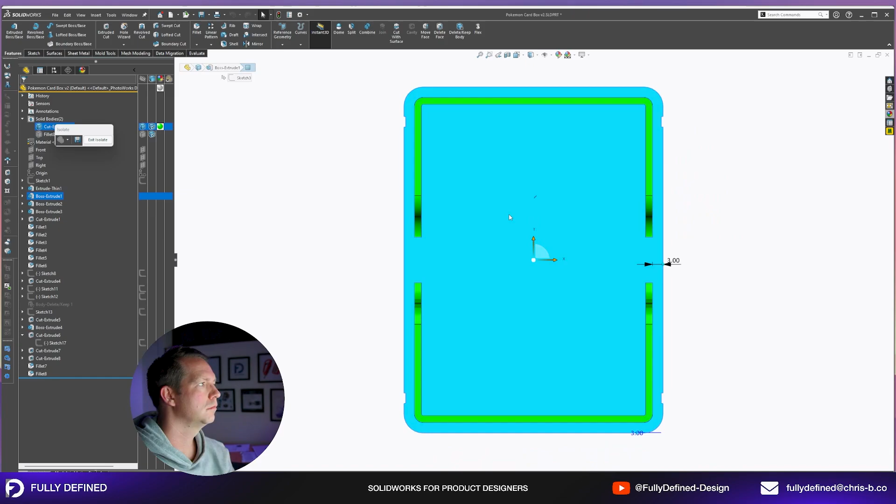And on the bottom, I'm just going back to the original hexagon feature. So I've done that properly this time with the fill pattern. I was just tweaking the settings here to try and get something that worked nicely. This one works pretty well. And just adding a few more fillets around the place to make it a nice, smooth kind of model.

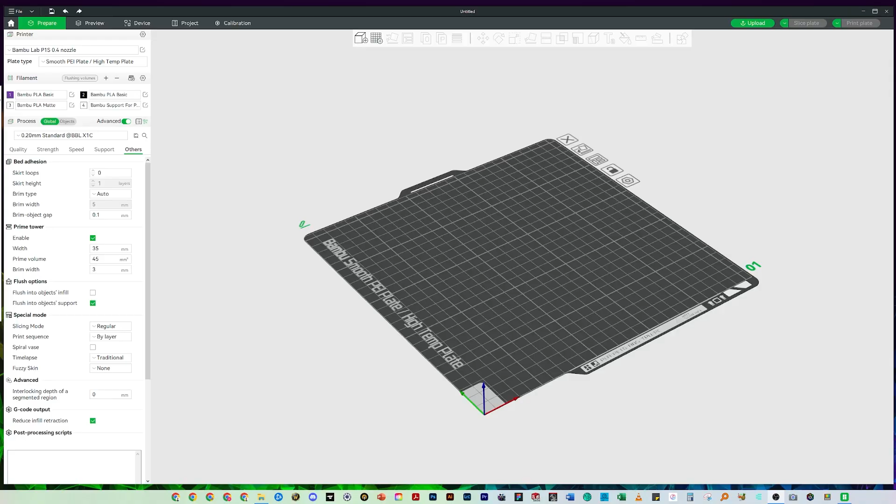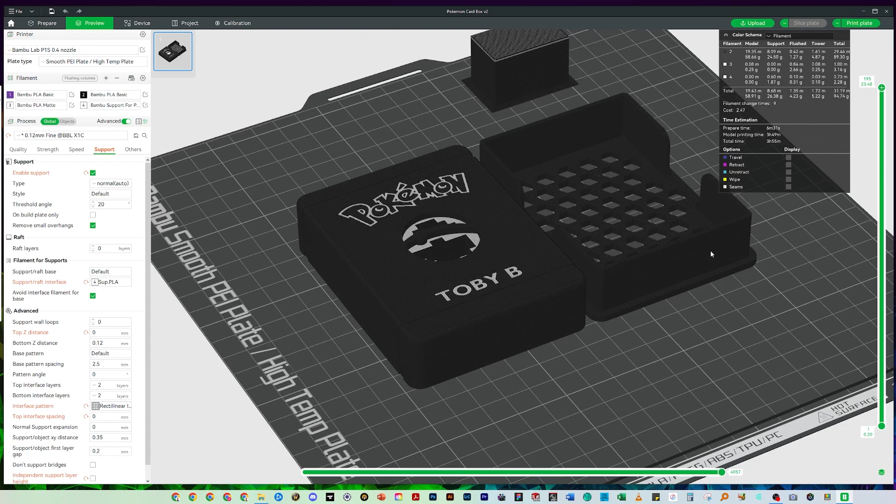So after that's done, again, exported the step files back into Bambu Lab, put them back down to the top face. Now on this one, I'm using the paint tool to paint in those recessed areas. So I've got the AMS with my Bambu Lab, which means I've got 4 different filaments available. So I'm using the black for the main body and a matte white for those recessed text areas.

And then I was playing with the ironing, which is the very top layer of the print. It just smooths it out a little bit with an extra layer of print.

Can you hold it up for the camera? So let me show the camera. You happy with it? Thumbs up.